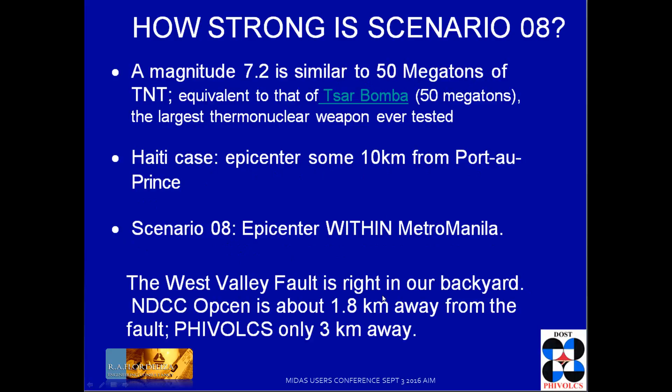But how do we characterize the magnitude of 7.2? Well, it is similar to a 50 megaton bomb. In Haiti, they have an epicenter some 10 kilometers from Port-au-Prince. In the Philippines, they call it Scenario 8, which is in Metro Manila, according to PHIVOLCS.

In the Philippine setting, the Philippine archipelago has 2 plates that push the Philippines upward. There are about 6 quake generators being monitored with different magnitudes, especially fronting Manila Bay, where about 7.8 is the magnitude.

So what dangers await when the West Valley Fault moves? As estimated by the agencies JICA, MMDA, and PHIVOLCS, about 40% of residential buildings will be damaged, about 38% for 10 to 30 story buildings, and 14% of 30 to 60 story buildings estimated. There's also a large percentage for public buildings, including the residential as well.

Are we doing something about these percentage issues? Yes. There was a guideline disseminated to all building engineers since November 28, 2007, and it has been repeatedly done in 2011, and it says in the guidelines that it includes earthquake considerations.

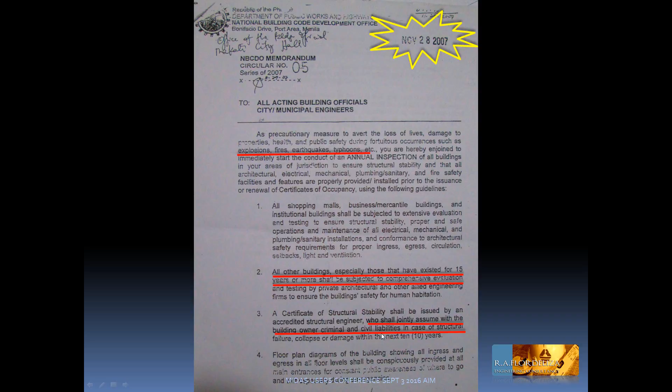However, all buildings, especially those that have existed 15 years or more, shall be subjected to comprehensive evaluation. If this is not done, a certificate of structural stability has to be in place. But if not done, the owner as well as the engineer on record have civil liabilities in case there is a collapse.

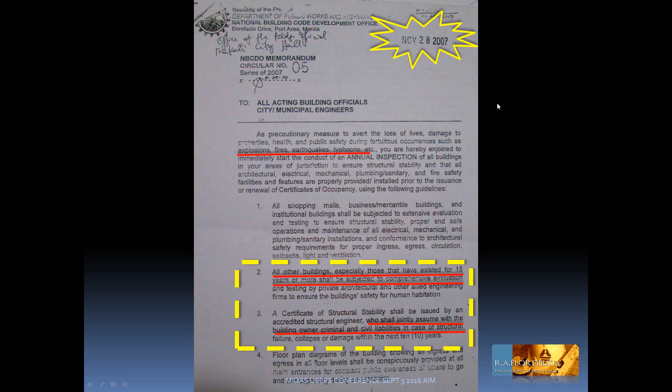Okay, let me clarify. That was 2007. Therefore, it is imperative that buildings qualifying for 15 years and above have to be re-evaluated first before installing accelerographs. Why? Maybe they are really aging. Some of these buildings are no longer compliant with the present National Structural Code of the Philippines, and the mode of vibration has to be updated and checked to set a baseline. If that is so, there is a need for strengthening. It has to be in place to have structural integrity, and the design-based level parameters such as the response spectrum must be known.

But in Midas, it now supports data extraction and structural health monitoring.

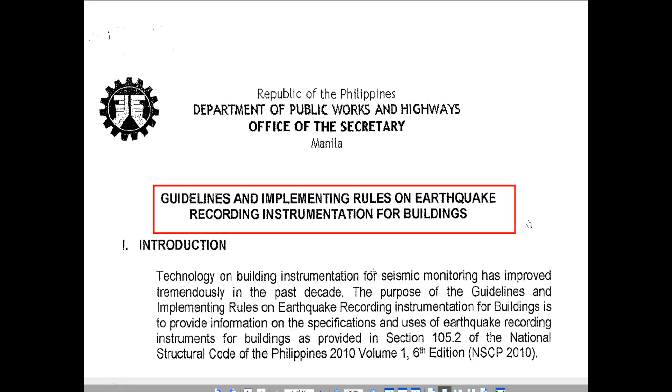Let's take a look at the IRR I mentioned. IRR is the Implementing Rules and Regulation guidelines from the DPWH, and ERI is the Earthquake Recording Instrument. The DPWH IRR runs this way: it is a guideline and implementing rule for recording instrumentation for buildings, and it was already signed into law.

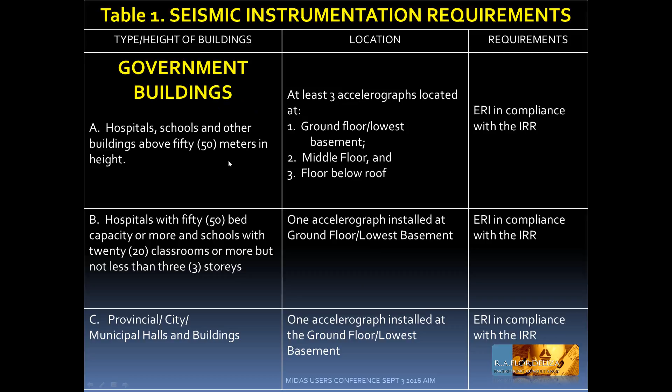In the guidelines, there are certain building types for government buildings, but we will focus on private buildings because we have so many buildings here in Metro Manila owned by private entities. It says buildings above 50 meters in height should have at least 3 accelerographs.

A hospital with 50 beds should have 1 accelerograph. A commercial building with an occupancy of at least 1,000 persons or a gross floor area of 10,000 square meters will have 1 accelerograph. Industrial buildings such as plants with 1,000 persons and 10,000 square meters should also have 1 accelerograph.

However, you need to set a baseline. What is needed in setting the baseline? According to this IRR, in the paragraph 3 requirements.

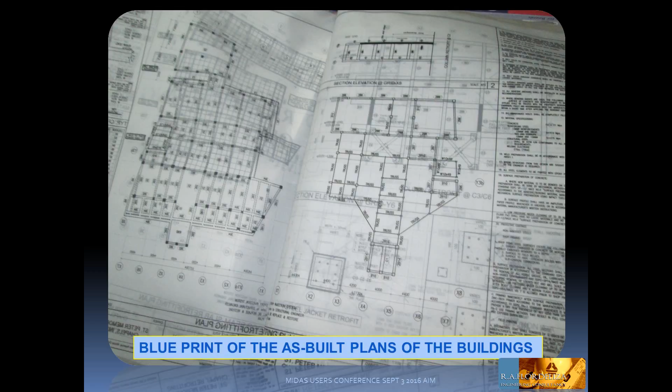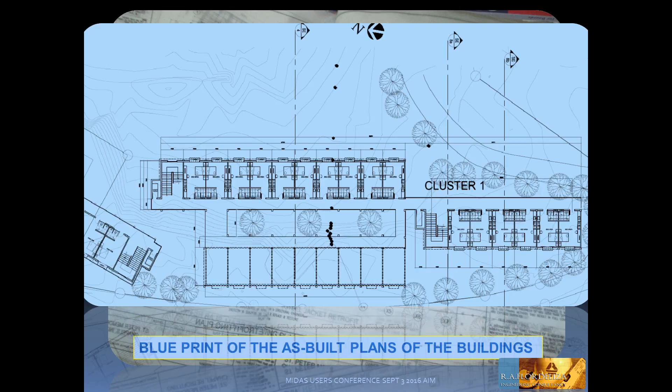Buildings to be instrumented need additional requisite information such as plans - these are as-built plans, the original plans, because these are the birth certificate of the building. You also need references like the architectural plans, including all the traverse lines within the boundary of the property, so you have a reference point to coordinate when placing your accelerograph.

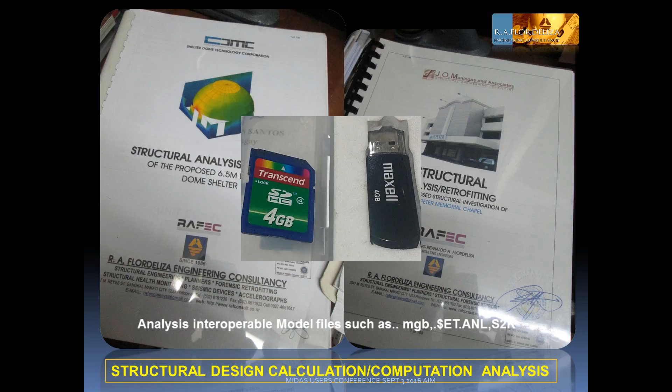You also need structural calculations that can be in an interoperable model file, whether in ETABS, STAAD, or any standard software that can be referenced, and you can save it on a USB drive or any means of storing your data.

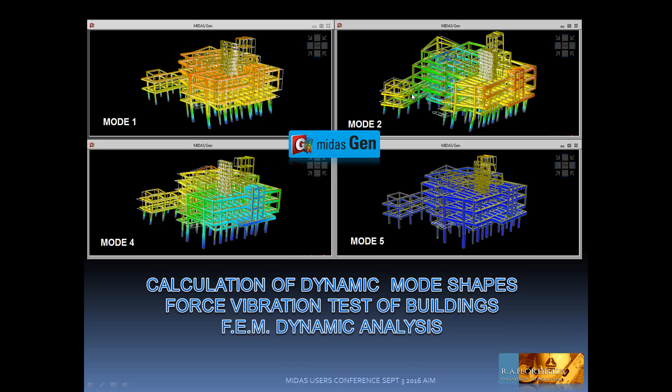However, if you have that data, you can also perform analysis on dynamic mode shapes and forced vibration tests of buildings through finite element dynamic analysis, so you can know what kind of vibration and period they have.

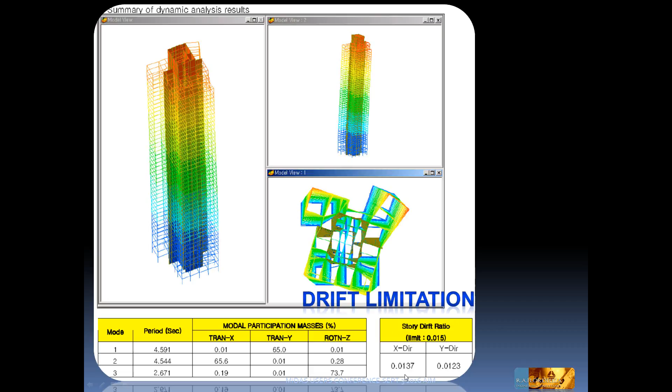You also need to know the drift limitation of the building, if it has been exceeded. The drift ratio limit for this kind of design is about 0.015, and we believe it is not being exceeded.

Determining the dynamic characteristics of a structural system is important in assessing vulnerability and in developing procedures to analyze and design future structures. Data recorded from instrumented structures is used to determine the structural characteristics.

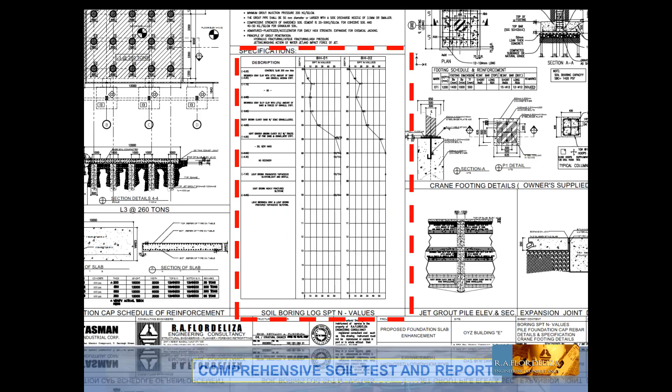You also need comprehensive soil tests and reports, so you need a boring log like this to know the stratification of the soil. This lets us reference the seismic waves traveling from the fault line, with a distance to your site. Boring logs give you a geotechnical report on this.

However, in the industry, they install a lot of typical accelerographs. Some put seismographs, some put accelerographs, but it's preferable to install accelerographs for buildings. Seismographs, let's leave those for earthquake recording by authorities like PHIVOLCS, since they detect acceleration of the ground.

In the National Structural Code 2010, there's an excerpt: unless waived by the building official, every building in Seismic Zone 4 - and the Philippines has high seismicity - over 50 meters in height shall be provided with not less than 3 approved recording accelerographs. It is specific - you should install accelerographs.

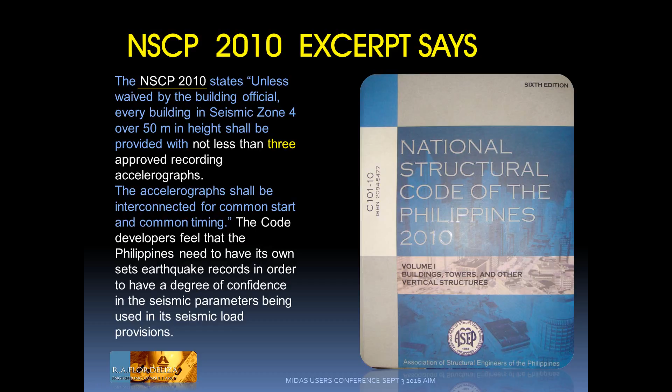The code developers feel that the Philippines needs its own set of earthquake records in order to have a degree of confidence in the seismic parameters being used in the seismic load provisions. It is used for structural evaluation.

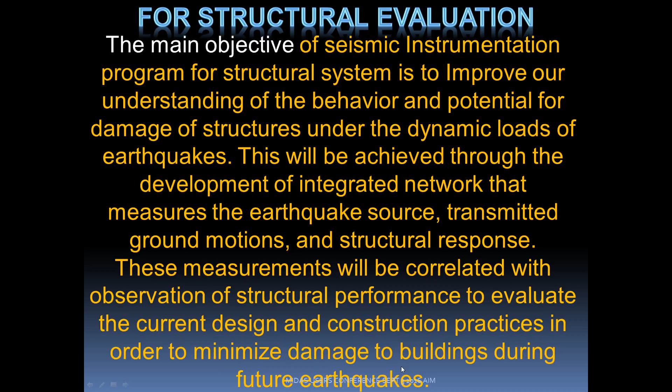However, the main objective of the seismic instrumentation program for structural systems is to improve our understanding of the behavior and potential for damage of structures under the dynamic loads of earthquakes. This will be achieved through development of an integrated network that measures the earthquake source, transmitted ground motion, and the structural response. This measurement will be correlated with observation of structural performance to evaluate current design and construction practices in order to minimize damage to buildings during future earthquakes.

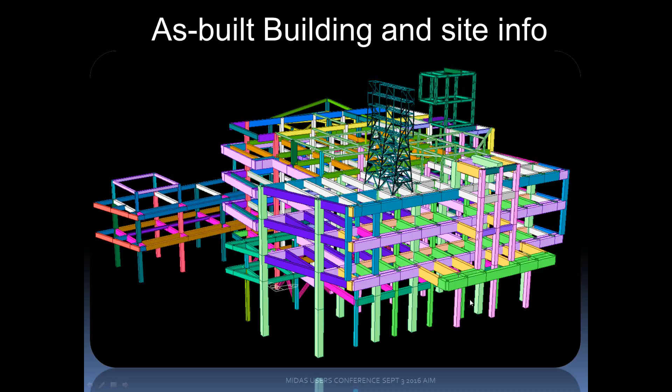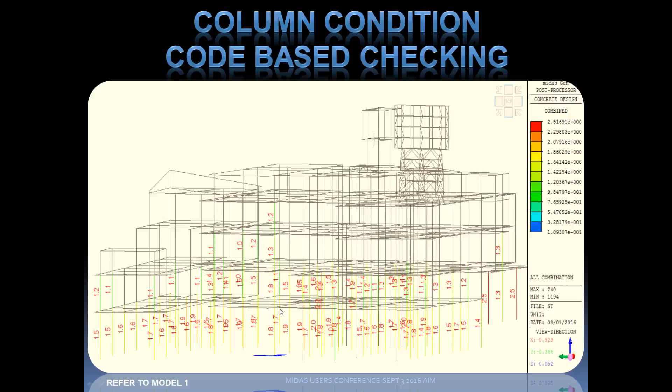So the as-built and site info was done through a series of measurements of all the members. You can see there are a lot of changing colors in the model because of different sizes, different strengths, and the green ones are steel structures as I have shown you in the real picture. And we have modeled that from the works menu. We have already modeled on a wireframe indicating red for concrete and blue for steel.

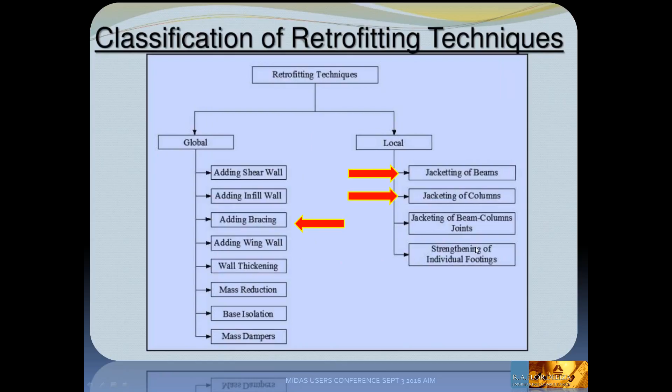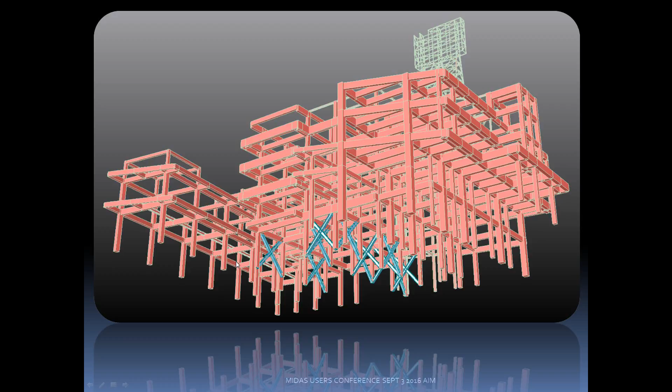And from the previous analysis we did, we have found out that the column condition, utilizing the present code, the National Structural Code of the Philippines, the demand capacity ratio of the columns are failing. So we have to introduce a lot of retrofitting solutions by getting a global analysis by way of bracing. For the beams and columns, we put some jacketing, and that's the technique we did for this structure. So there is a real need for bracing so that the other columns will sustain the integrity.

What we did in the structure is to brace all the perimeter columns, but we feel that it's not economical, so we removed them one at a time, and we came up that we need only these braces at this area to compensate the strength of all the columns, so it will not exceed the demand capacity ratio. So beams also were retrofitted because we found out the demand capacity ratio had been exceeded. Okay, this building is now retrofitted.

So we used some proprietary program in retrofitting this because we used some carbon fiber, but for steel we used the traditional method of steel design and retrofitting the braces. So now this building has been retrofitted and now ready for installing an accelerograph. But however, we are being guided on how to install seismic instrumentation with proper precision. Instrumentation shall be installed with normal standard of professional care.

The need for long-term reliability shall be foremost in the installation work plans in detail. There must be due diligence from you engineers. Well, we have to find the center of mass and rigidity and equate this to the center of gravity of the building. So in theory, the overall mass and stiffness of the structure is always considered.

So the center of rigidity may not coincide with the center of mass. So there will be a torsional effect when it comes to the interaction of the soil, when there's rocking, twisting, jumping, swaying to the left and to the right. However, in the actual frame, in the theory, there is a reduction of a multi-degree of freedom system into an equivalent single degree of freedom.

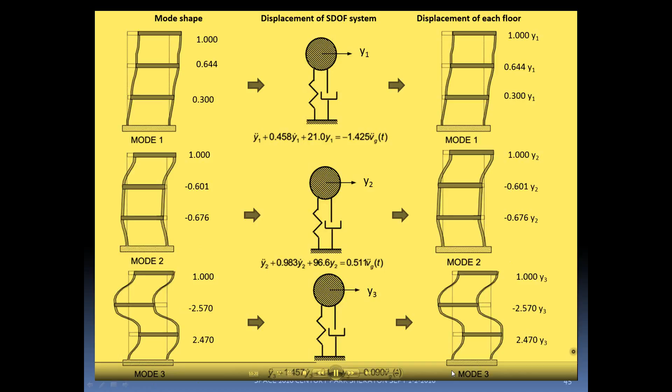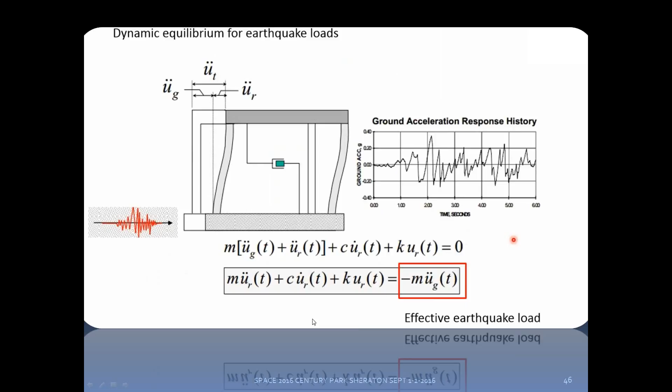So we discretize the frame as a mass, and that kind of joint is discretized as a stiffness on every level. So a mass has been equated to a single degree of freedom, because we need only a shape to give us a drift, a value where the mass participation factor is always considered. So this is the theoretical application, where the mass is simplified as a single degree of freedom to get a displacement on each floor, considering mode 1, mode 2, and mode 3.

In the dynamic equilibrium for earthquake, using a response from the accelerograph of the ground motion, displacement can be determined. If you have an acceleration from the response history of the accelerograph, that can be equated by the effective earthquake load, as simplified in this formula, and simplifying this utilizing the Midas concept. So you can import all the response data from the accelerograph and put that here, assuming we want to find it at a certain time as a function of the fluctuation of the accelerograph of that earthquake.

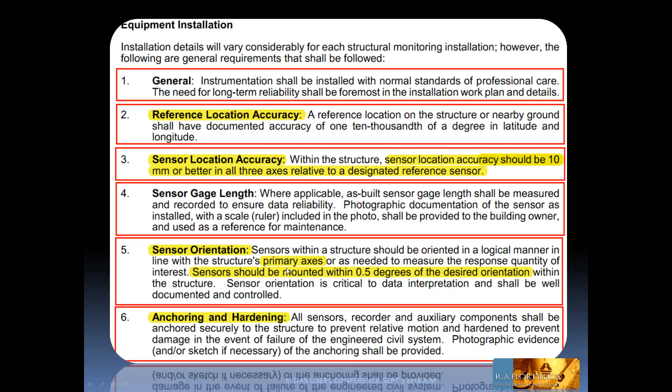In this case that is 0.3202. So multiplied by the gravity, which is 9.806, you have an equivalent of 141.3 kilonewtons as expressed by the mass multiplied by the ground acceleration.

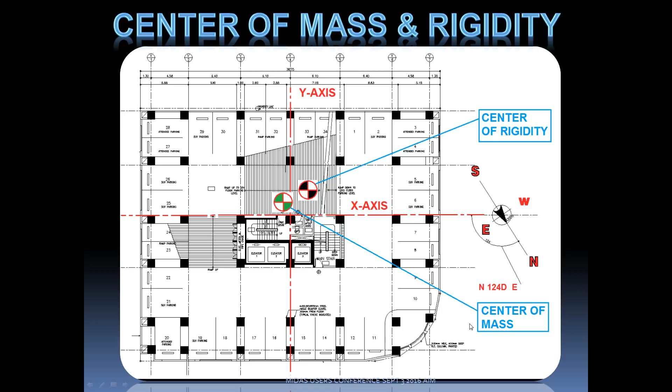Now, installing the instrument, there are certain guidelines we are to observe. But I will consider number 2, number 3, and number 5, because 1, 4, and 6 are just minimal for us to understand. But 2, 3, and 5 are most crucial to observe.

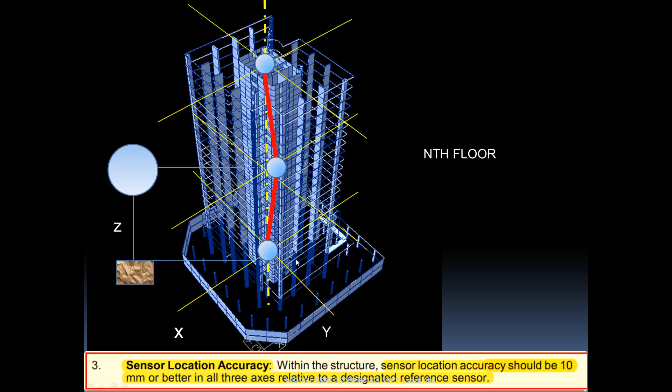First, we have to know the center of mass and rigidity. As we know, in buildings it may not coincide unless there is a very symmetrical arrangement, even the stiffness of the columns and the positioning of the core, as well as any enlargement of column is not present.

In buildings, and it says again, sensor location accuracy. Within the structure, sensor location accuracy should be 10 mm or better in all 3 axes relative to the designated reference sensor. If this will be a reference sensor, your alignment must not exceed 10 mm to the x-axis, 10 mm to the y, and 10 mm to the z.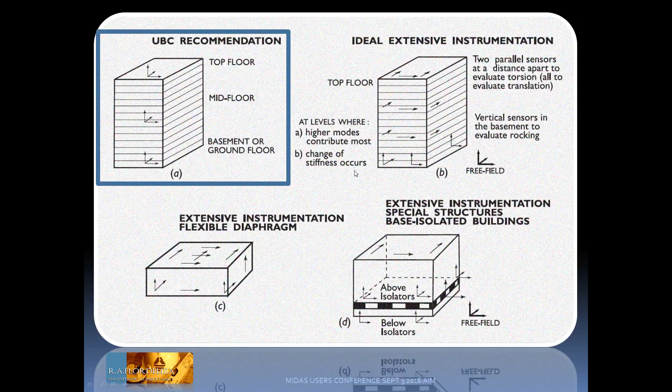However, at the mid portion, first you have to simplify your model into a single degree of freedom wherein you can get the z-axis. This can be done by utilizing the center of gravity of the building. So in the final alignment, that should not be more than 10 millimeters.

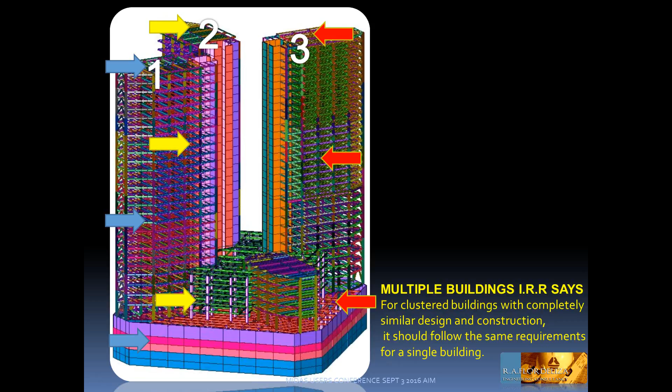However, this is very difficult to lay out, but it is possible. You just have to use some total station and proper coordination at the site, so you will have that exact positioning. In the Uniform Building Code, the alignment of the three is suggested.

However, with the different towers with a common podium, the IRR says for clustered buildings with complete similar design and construction, it should follow the same requirement for a single building. Meaning, if that is 50 meters and above, you will be required at least 3 accelerographs.

So this is why it is a must that engineers have to be very keen on how the device was properly located and installed. This is for the correct data extraction to be interpreted for damage identification use, where the major axis of excitation angle of the seismic response to the building is our utmost interest.

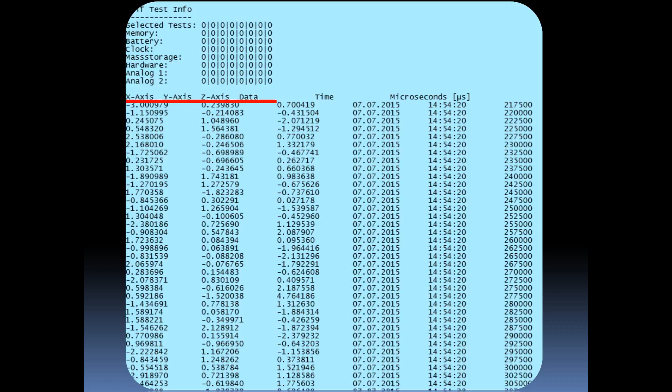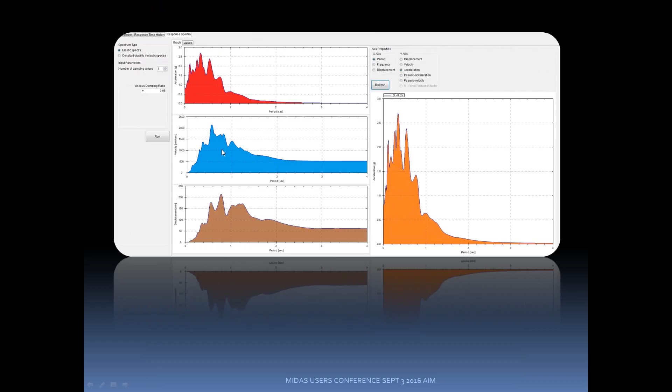However, we really don't need data coming from a thermal paper or a hard copy paper. It should always be in a numerical format, accelerograph raw data output for use in mathematical modeling of the building. This can be extracted and imported to the standard software used by structural engineers. Data can be initially set up on a hard copy, but it should be readily available in a numerical data format.

Okay. From that numerical data, you can easily plot your response spectra. So you have to have a base reference. In Midas, on the right you have a waveform coming from an accelerograph device, and based on the x-axis, and utilizing the raw data from a numerical output, we can easily import that into Midas. So you will see you have a similar waveform.

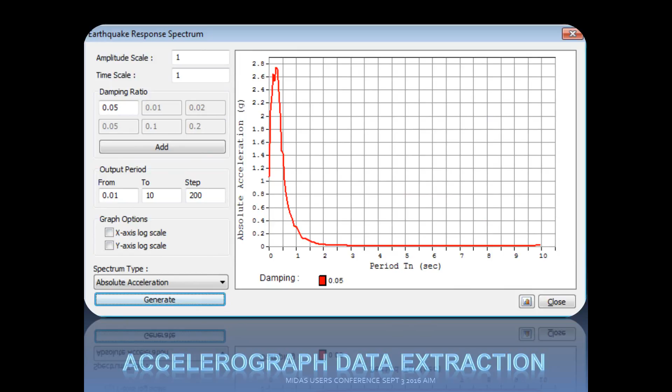Data import to Midas Gen is for site-specific hazard assessment. You can import your data, you can convert it into a response spectrum, and you can generate a design spectrum also. Midas supports our seismic instrumentation services, such as comparing the design and the site-specific spectra.

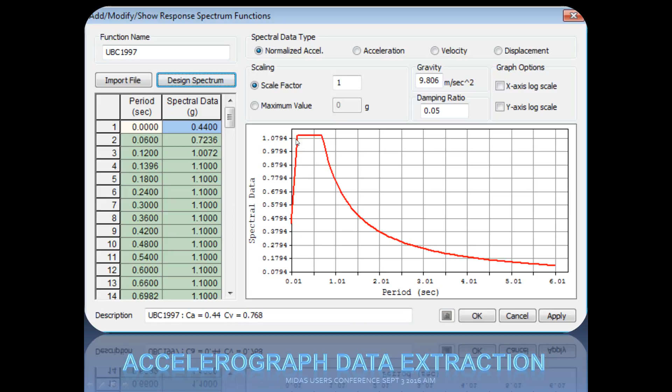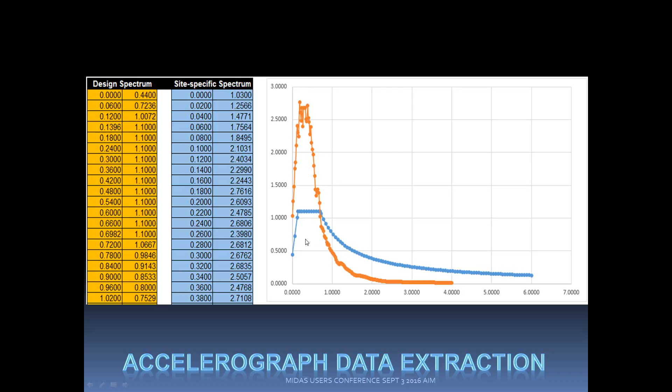How? From here, this is a site-specific spectrum taken from the accelerograph, and we have found that the spectrum looks like this. And comparing this to the design-based level of the UBC, because we normally use in the Philippines the UBC 97. So from the distance of a certain locality, the coefficients are considered. So spectral data is being plotted. This is the format of the spectrum.

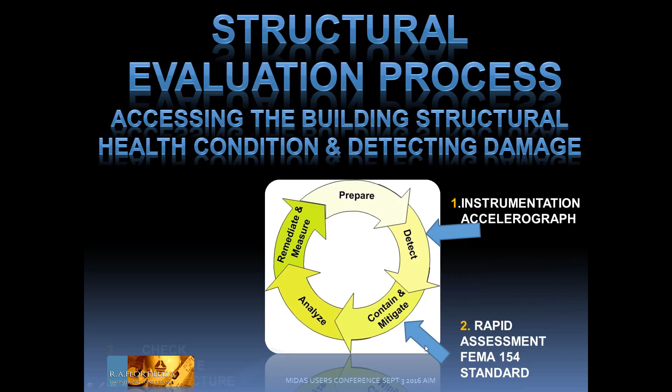So now we go to the structural detail design.

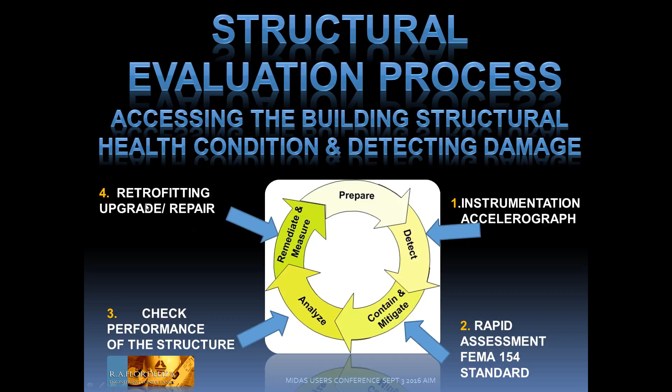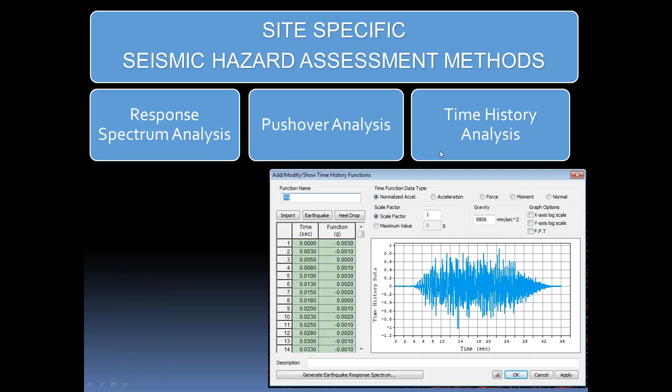Structural evaluation process is just assessing the building structural health condition and detecting damage. First, you put your instrumentation. Then when there's an earthquake, you check your building utilizing the FEMA standard to mitigate. And then if you need a further analysis on the performance of the structure, then you have to use the accelerograph and check the performance from the base level. And if you have seen some failing member, that's the time you can retrofit and upgrade your building.

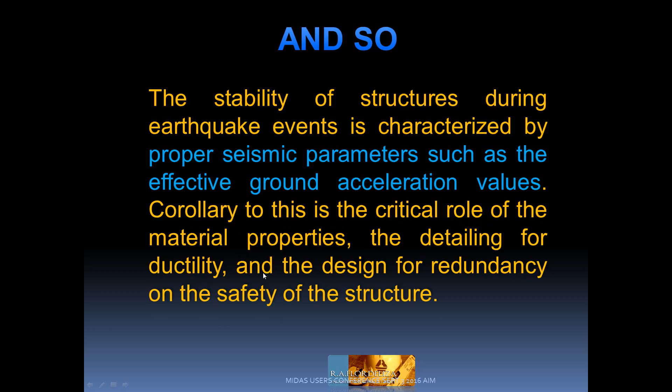With Midas, there are 3 levels of analysis which you may be able to perform. What are those? Response spectrum analysis, pushover analysis, and time history analysis. But we will be taking up response spectrum and time history analysis because pushover is not within the premise of this discussion.

From the analysis, you may know which quake direction is likely to damage the structural members. And so, the stability of the structure during an earthquake event is characterized by the proper seismic parameters such as the effective ground acceleration values. Corollary to this is the critical role of the material property, the detailing for ductility, and the design for redundancy on the safety of the structure.

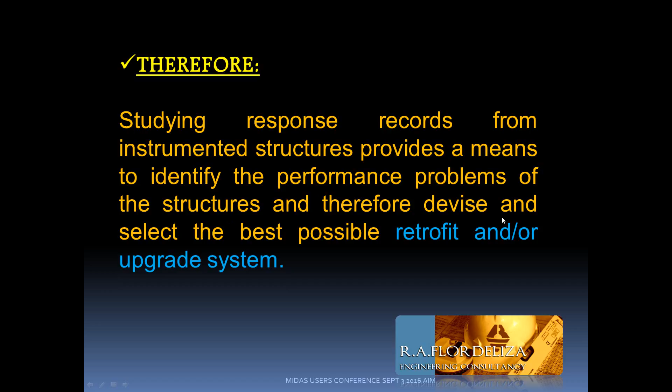Structural health monitoring is just something like this. You have an accelerograph reading the acceleration of the ground. Somebody has to interpret that and extract. And before you do that, you have to have structural consultants to interpret that and analyze the building so he can tell you if it is okay or it will be needing retrofitting. Therefore, studying response records from the instrumented structure provides the means to identify the performance problem of the structure and therefore devise and select the best possible retrofit and upgrade.

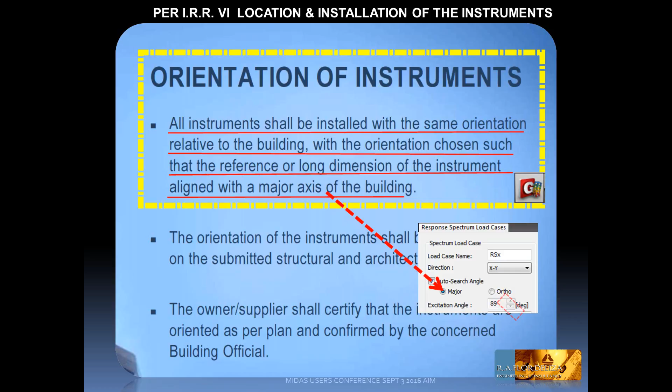However, you have to know if the device was properly installed so you can correctly correlate this to your finite element. Again, in the IRR, there is a certain clause on the orientation of the instrument. All instruments should be installed with the same orientation relative to the building, with orientation chosen such that the reference or long dimension of the instrument is aligned with the major axis of the building.

There is an axis we are talking about. This is the excitation angle. Very important. This angle is the angle where you will have the maximum response of the earthquake, where it will find your building in its weaker direction. In Midas, it has a feature that can locate the major excitation angle of our interest.

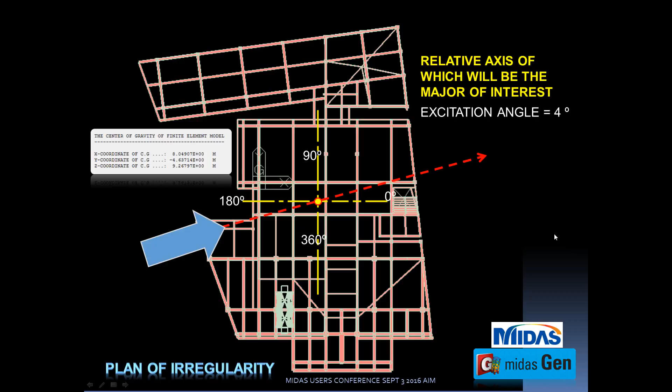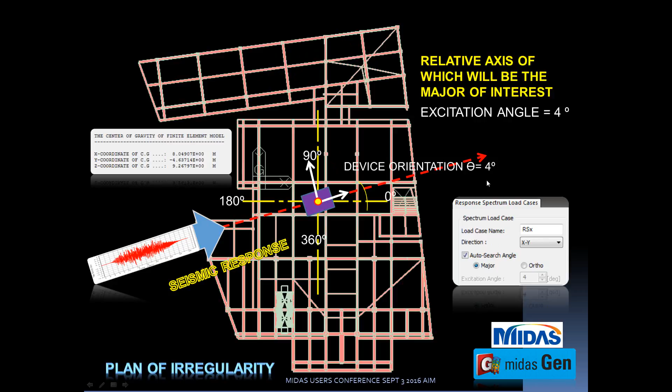How? In this case, with the model of the case study and the plan view of the building, we have found in the general finite element analysis that we are given these coordinates. So that is calculated and positioned to that effect. Counterclockwise is your direction from 0 to 90. So the relative axis, which will be the major interest, has been calculated to be 4 degrees from the analysis. That is the maximum response of the earthquake. It has been calculated at 4 degrees.

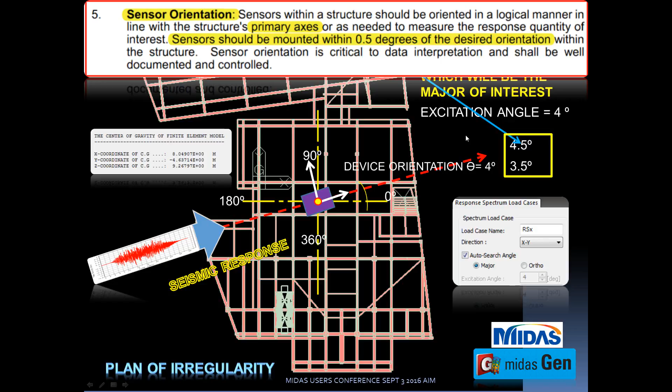So now you can position your accelerograph having a reference on the Y and X. So device orientation is about 4 degrees from the reference X. So again, sensors within a structure should be oriented in a logical manner in line with the structural primary axis, or as needed to measure the response quantity of interest. Sensors should be mounted within 0.5 degrees of the desired orientation within the structure. Sensor orientation is critical to the data interpretation and shall be well documented and controlled.

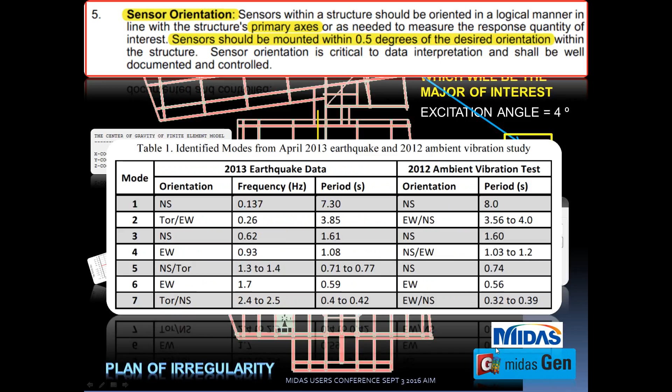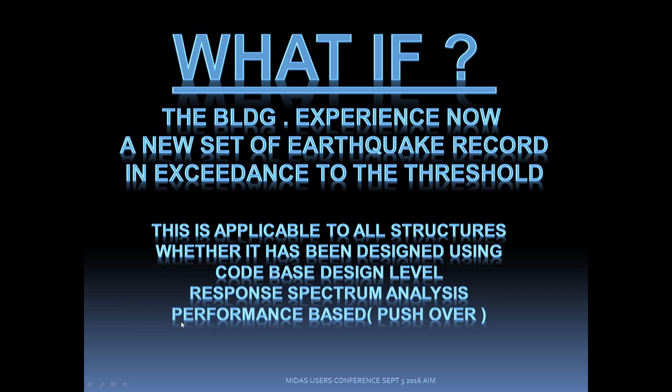So you cannot have more than 4.5 and it cannot be less than 3.5 with that 0.5 degrees for your orientation. This is how you position your accelerograph. That will now be your reference for the north and the east-west. Once the earthquake hits you in this way, there will be an effect on the north and east-west direction of your building. So from the ambient vibration test, with that orientation, you can know immediately your values. And from the analysis, you can get all the frequencies and periods.

What if the building now experienced a new set of earthquake records in exceedance of the threshold of the baseline earthquake reference? This is applicable to all structures, whether designed using a code-based design level analysis, response spectrum analysis, or what we call the performance-based pushover analysis.

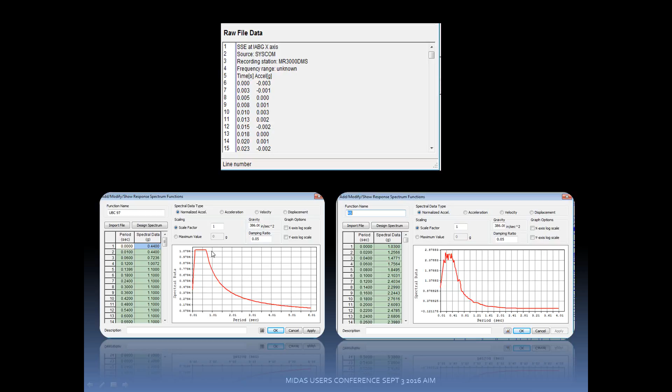Let's take a look at a raw data file coming from an accelerograph. In this case, we took the X axis. The source is a kind of accelerograph we call SysCom. And from here, we plotted the response spectrum of the code base, and from this raw data we plotted it in Midas. It ran this way.

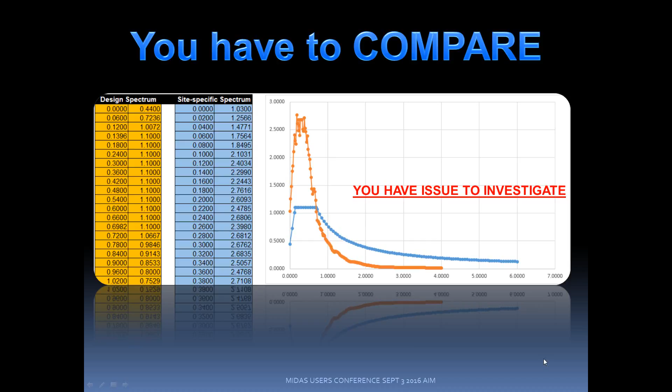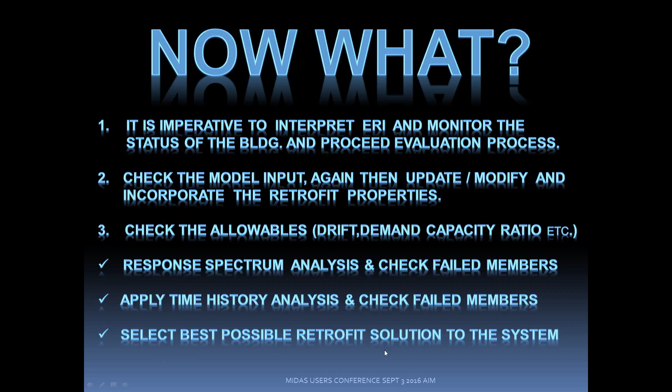But take note, the fluctuation of the response spectrum starts with a greater number. This point is about 0.8 something, and the response spectrum for the design UBC 97 starts with 0.4. So the peak is quite high, and the sinusoidal peak is really greater than the design base level. So comparing these two, we found out that the fluctuation is too big, and you have the issue to investigate your structure because it exceeded the base level spectra.

Now what? It is imperative to interpret ERI, monitor the status of the building, and proceed with the evaluation process. You have to check the model input again, then update and modify it, incorporating the retrofit properties. Check the allowables, drift, demand capacity ratio, etc. Run response spectrum analysis and check failed members.

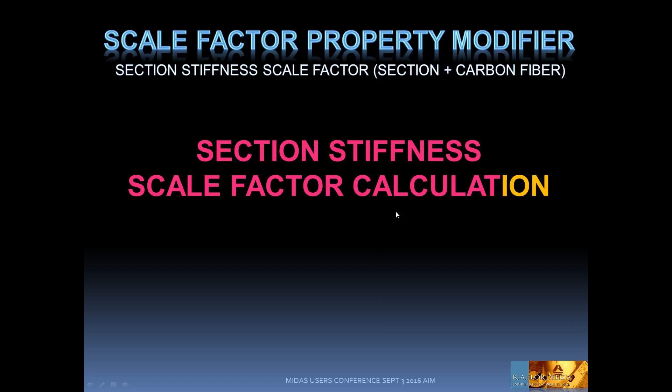Apply time history analysis and check failed members. Select the best possible retrofitting solution for the system, and update when needed to strengthen the condition of the structure. How do we do that in Midas then? The approach is this way: updating.

First, because these are retrofits using carbon fiber on the original section, you have to take note of the section stiffness and scale factor of all the members you have retrofitted, including columns, beams, or slabs, because you have to incorporate those.

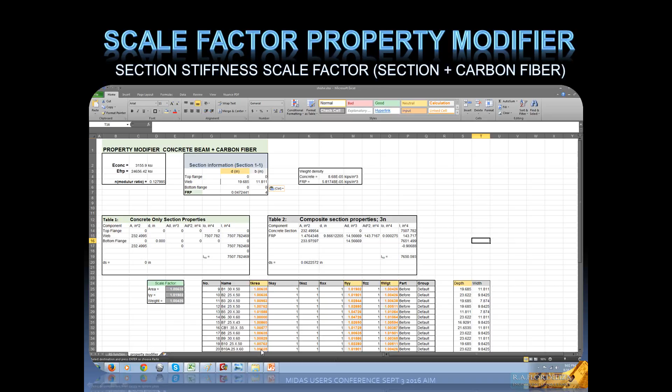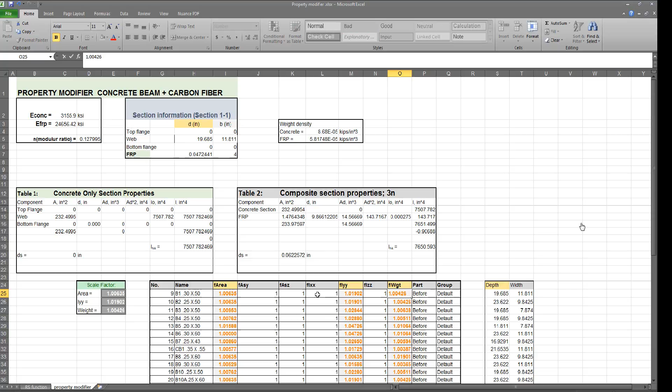You will notice there are already numbers there in orange that have been updated. This is how we do it in Midas. If this is the section having that carbon fiber stiffness, we have to calculate the overall stiffness scale factor. Now this is how we did it in the basics. Of course, I have a file, and we are concerned with the modification.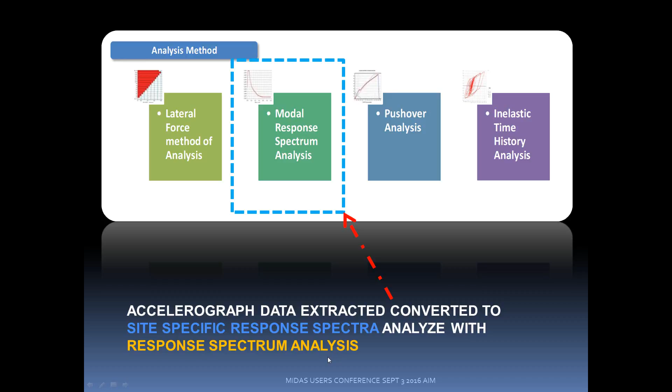Let's say we don't know that. So, having a number there, I just copy it there, and voila, I have all this area, moment of inertia, and the scale factor of the weight. All I have to do is place it here. So that's how we did the updating of the members. From here we copy this, paste, and update to Midas. Okay, so that's how we did it in Midas Gen.

Okay, response spectrum analysis. In the response spectrum analysis, we get the accelerograph data, extract it, and convert it to a site-specific response spectra. Then we analyze it using response spectrum analysis. There are procedures for response spectrum. You have to know your response spectrum function and your response spectrum load cases, set the response load case, and then run the analysis.

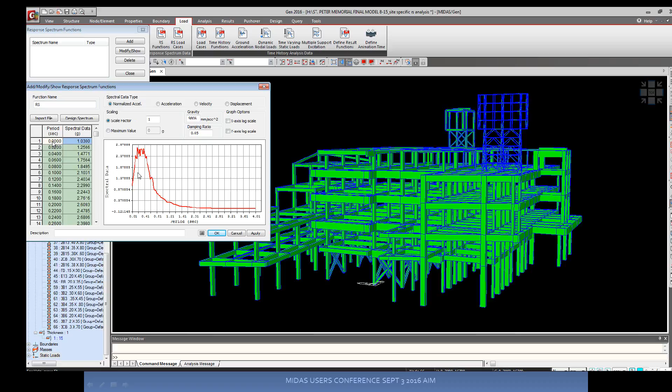From this analysis, based on the response spectra converted from the actual recorded accelerograph, you can now see whether the members have been severely busted. I'll show you from here. This is the data coming from an accelerograph. What I did is copy all of this, and then I have some analysis here.

Dynamic load, static load, but you have to use dynamic load and put in the response spectrum. I delete that, then I add a new response spectrum. What I copied before, I paste here. Then I plot, and I have a response spectrum. Now we go to the response spectrum load case.

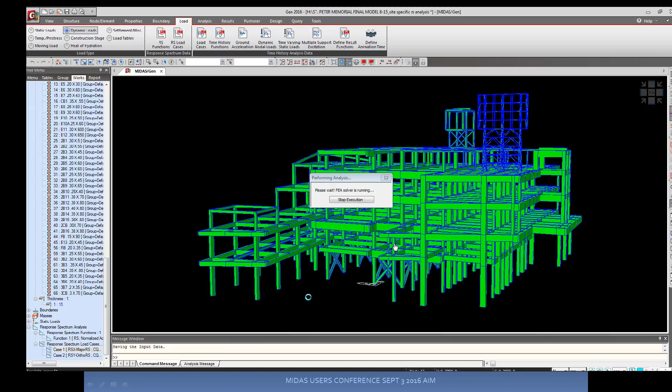Now you have to assign a response spectrum in X, but you have to know the major excitation, since this will change. The scale factor for R is just the importance over RW; you get 0.167. Adding that load case, you have a response in X. Similarly, for Y, it's just the orthogonal 90-degree positioning of the excitation. You add this to the window, and you have Y. So you have updated your major X and Y.

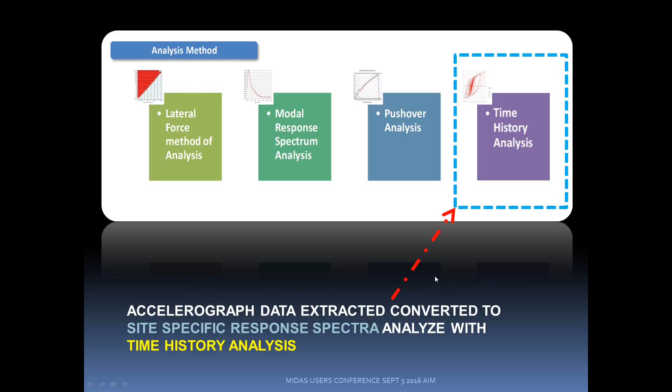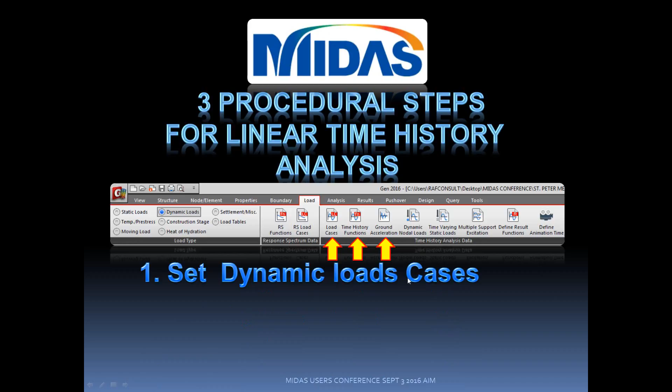Okay, let's close that, and you have this model ready. So we run the analysis, and from the results we found that the demand capacity ratio has been exceeded. See, before it was retrofitted, all were okay, but now, using the accelerograph data and a new response spectrum reveals that this demand capacity ratio has been exceeded.

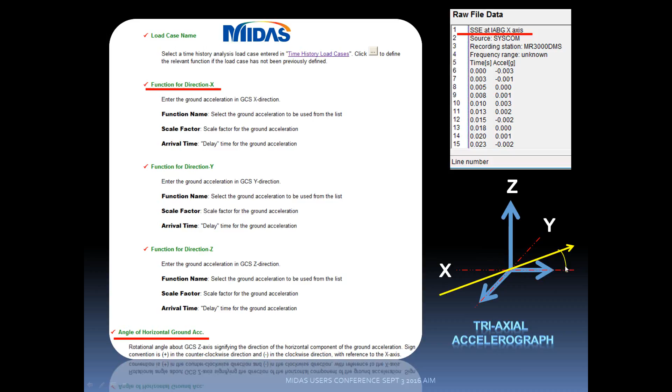Now for the time history analysis, it is similar. From the extracted accelerograph data, we convert it to site-specific response spectra analyzed with time history analysis. However, you have three procedural steps for linear time history analysis.

You have to set the load cases, dynamic load cases, and time history function, and set the ground acceleration. In Midas, there is a clause stating the function on the X. This is from a raw data file, and you have to be keen on the angle of excitation, which is based on the reference of X. Okay, so from here, first we get the dynamic load, then time history, and ground motion. We will not discuss these three too much because we will not be talking about this later.

So we have to set a group damping, because we have two kinds of material: the concrete and the steel. So you have to set the damping of each one, where we know the damping of the concrete is about 5%, 0.05, and for steel we use 2%. Once that has been assigned, you have to use strain energy proportional damping so that there will be a distribution of the strain energy on each material.

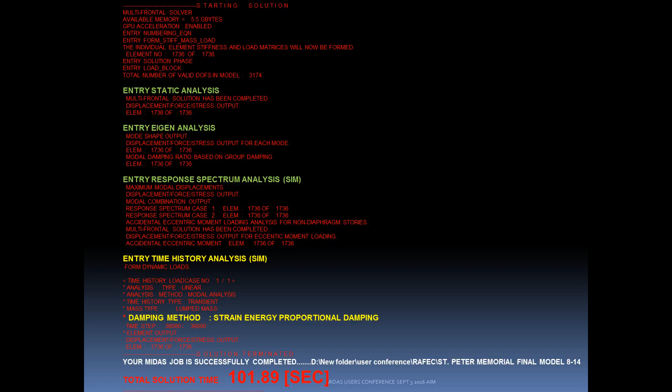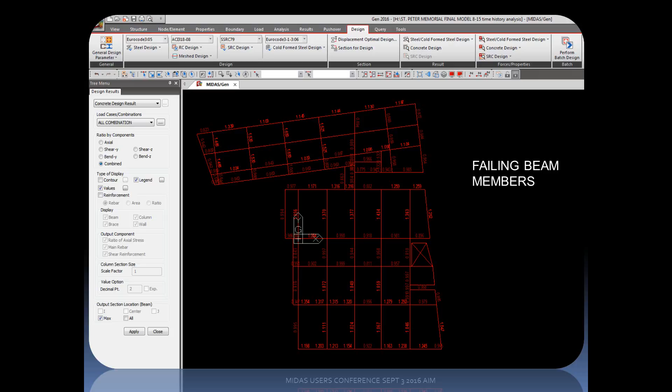Now, having assigned those time history functions, from running the analysis we can have these values, and it was found that with Midas it is easily completed in 101 seconds. So that's very, very fast. And we found out, using the time history analysis, that beams that before were not failing, now it readily shows that there are more beams failing. Therefore, it is an accurate way of predicting damage when it comes to a retrofitting system.

But how to set a building simulation with time history analysis? Is this simple? You just go to the Result tab, that's your first procedure, and you will be prompted by a time history result, that's your second. And the third is to set an increment where you feel it will be faster. In this case, it is 0.001. I changed this to 0.05 to elevate the speed. You can assign 0.05, 0.09 if you want.

So this is a simulation of a linear time history of the model we did, including the analysis, where we set the instrumentation excitation angle at 4 degrees, having an orthogonal 94 degrees in the y direction, which has a peak here. Now we can note that the time steps are moving, and in a while that vibration can be detected by the building itself, having a 1.03 peak ground acceleration for a 36-second period.

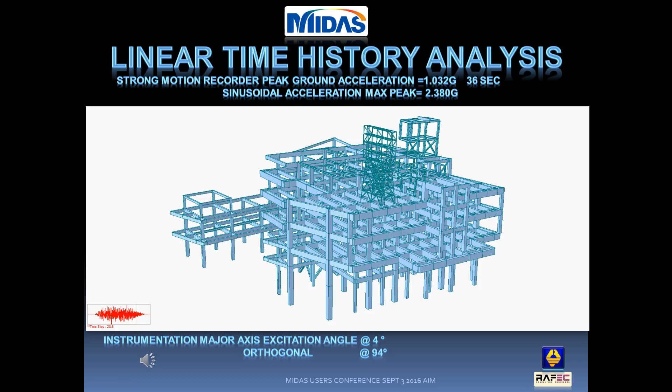You will note that this earthquake is too strong, that the behavior of the structure is tremendously swaying, which is not acceptable. And from this analysis, we have found out with this kind of peak ground acceleration, the total building was really damaged and collapsed, maybe. And that is not what we really intend as an engineer to check the behavior.

Well, in conclusion, the importance of building instrumentation, recording the acceleration response of the structure, has served the scientific and engineering community well and has been useful in assessing both new and old design analysis procedures, improving code provisions, and in correlating the frame system response with damage. The accelerograph provides a very useful tool in today's earthquake engineering.

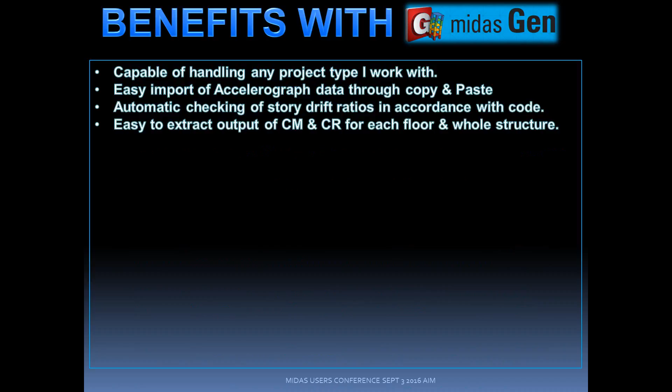The benefits with Midas Gen are it is capable of handling any project type I work with. Easy importation of accelerograph data through copy and paste. Automatic checking of storey drift ratio in accordance with the code. Easy to extract output of center of mass and center of rigidity for each floor and the whole structure. Automatic calculation of major and orthogonal angles for seismic loading and seismic instrument installation. Easy handling of multi-tower structures with independent vibration.

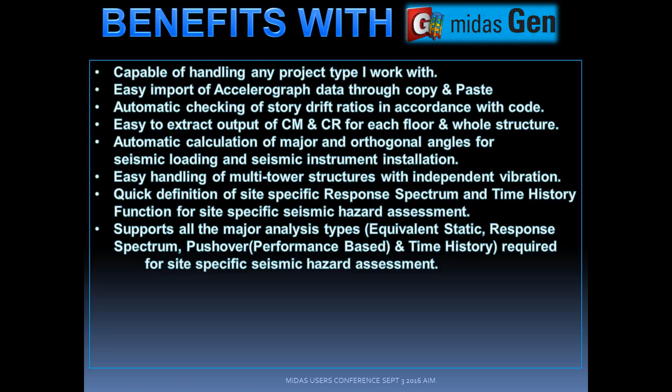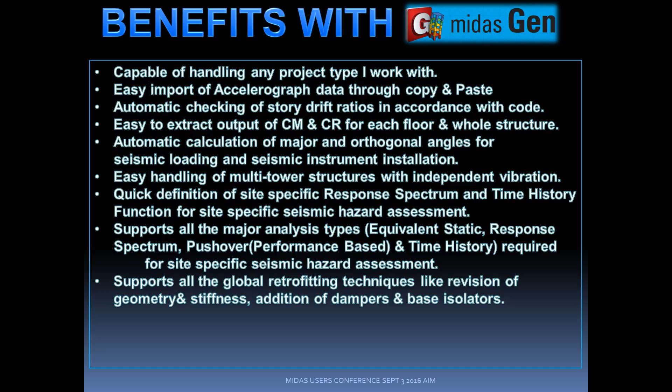Quick definition of site-specific response spectrum and time history function for site-specific seismic hazard assessment. Supports all the major analysis types: equivalent static, response spectrum, pushover, which we call performance-based, and time history, required for site-specific seismic hazard assessment. Supports all the global retrofitting techniques like revision of geometry and stiffness, addition of dampers and base isolators. It's a one-stop solution for site-specific seismic hazard assessment.